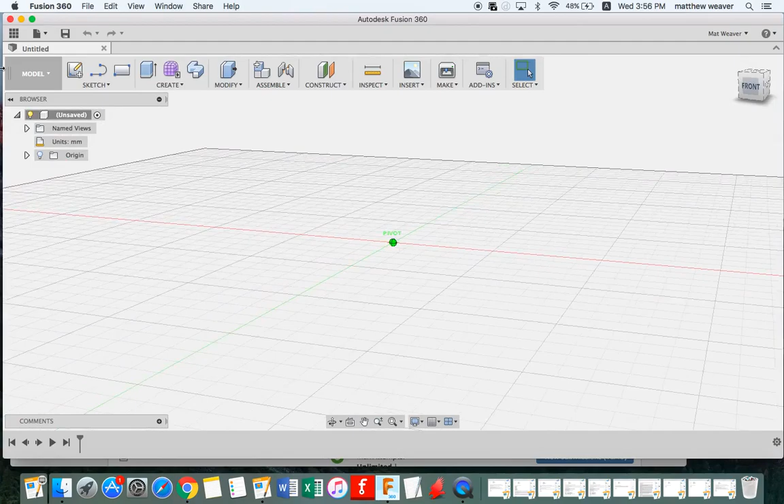When we open Fusion 360 for the first time, we're given this screen. We can move our canvas by clicking on the box and moving around, and you'll see that the flat plane moves. What we're actually doing is either moving ourselves around a pivotal point in the middle, or moving the world around that pivot. It doesn't really matter what your perspective is, just understand that when we move the cube, we move the world.

Okay, let's say we've got a crazy orientation there. To get back, hover over and press the home icon. Sometimes it doesn't work, and if that's the case, you need to restart the application, and this will start working again. We can easily have a look at the top, go around, have a look at the front, and have a look at the right side.

What you're going to be doing is making your Pinewood Derby car, and in order to start that, you need to decide where you're going to look at it from. Are you going to look at it from the top, draw a square and pull up? Or are you going to look at it from the front, draw a square and push back?

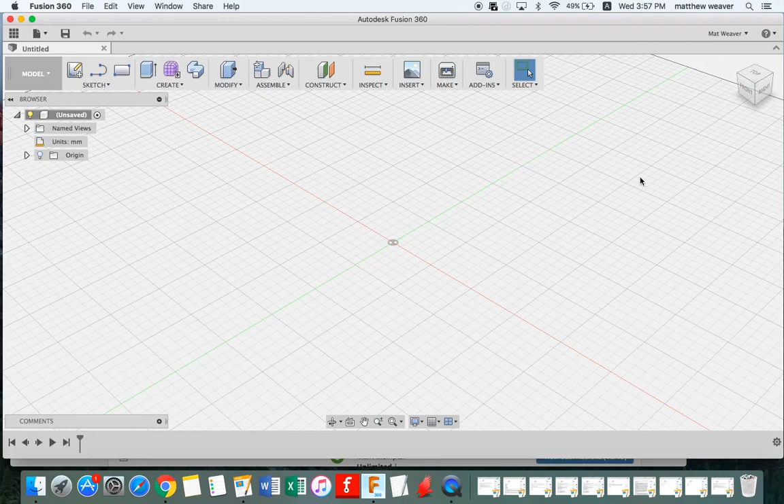I'm going to start at the top. So what I do is go Sketch, Create Sketch, select the bottom, the flat plane, so now my view is from the top down.

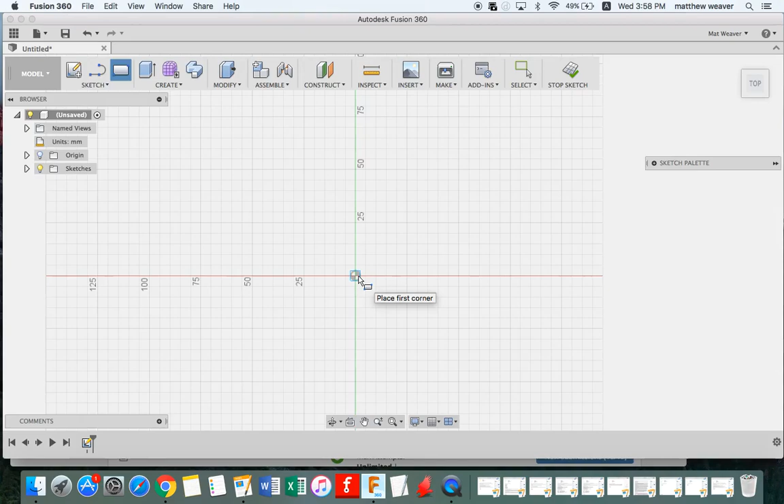You're going to draw your rectangle, and try to keep it as accurate as possible. So if my car was, say, 15 centimeters, that would be 150 millimeters. So there's 10, and there's another 5. Keep going, keep going, and you'll see the number at the bottom changing to 150.

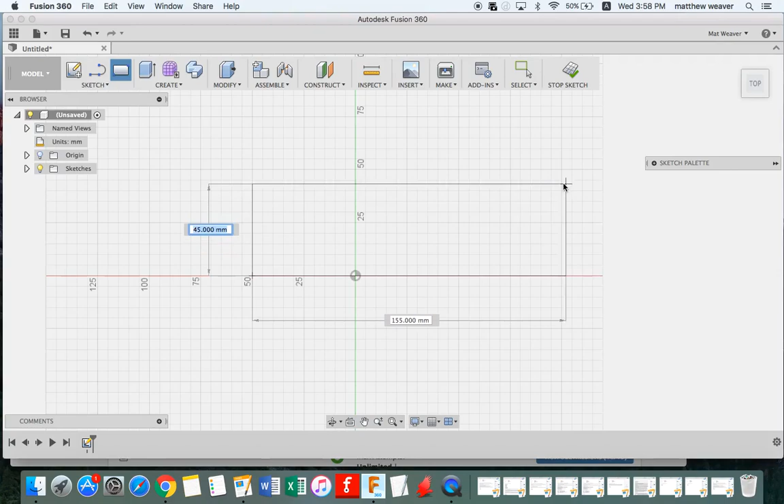The number at the side is changing, and that's the width. So my width was 40, let's say, and my length was 150. I could move it around, or I could tap in 40, tab, 150, enter, and that would be my car.

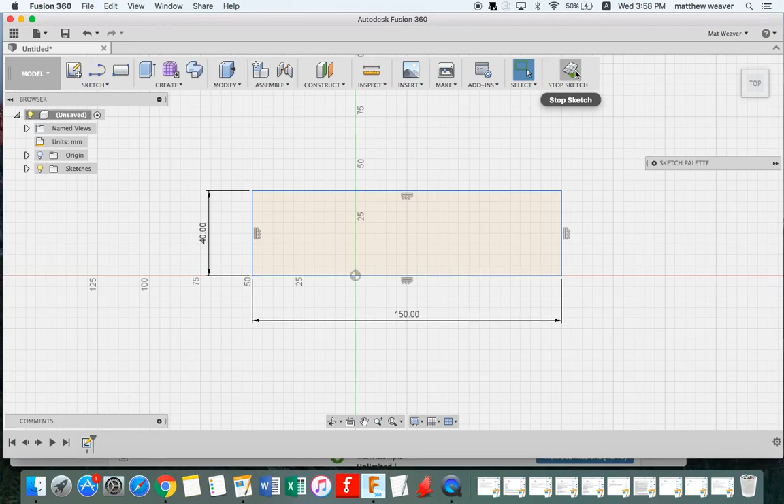Of course, your dimensions might be different, so I suggest you look in your books to get those dimensions. When I'm done, I'm going to stop the sketch, and this brings me back into a 3D view. The next part is I'm going to modify this.

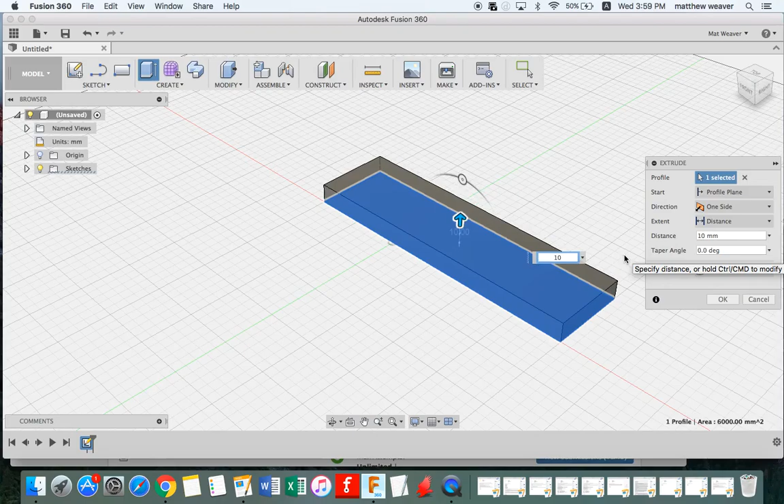I'm going to drag it up to make it into a 3D form. So I click Modify, press Pull, click it, and move it up. Now my block of wood happened to be 15 millimeters. Yours might only be 10. If it was 10, type in 10, or 12 - I'm going to type in 15. Okay, now I've got the block of wood.

There's a few things I can do. I can either turn it into a block of wood, make it look cool, or I can start shaping it. I'm going to start shaping it first. So what I do is draw a line around here, and push it away.

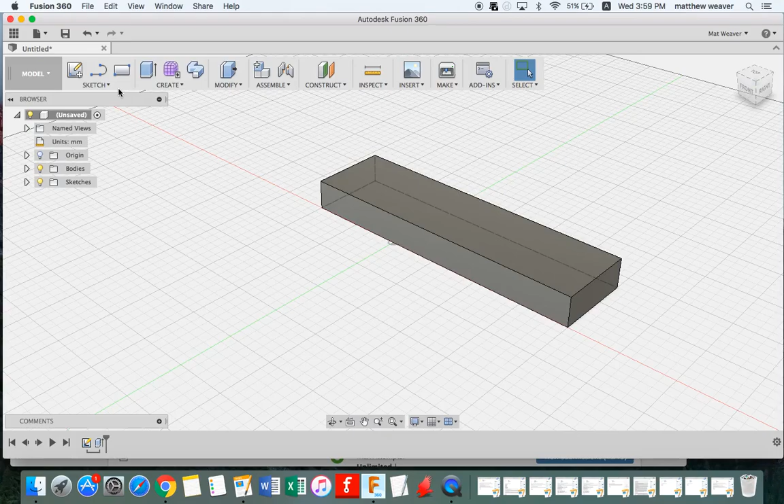Watch: Create the sketch, click on the side of the wood itself. Now, have a look at some of these - straight lines, rectangles, circles, arcs, ellipses. I'm going to use a spline.

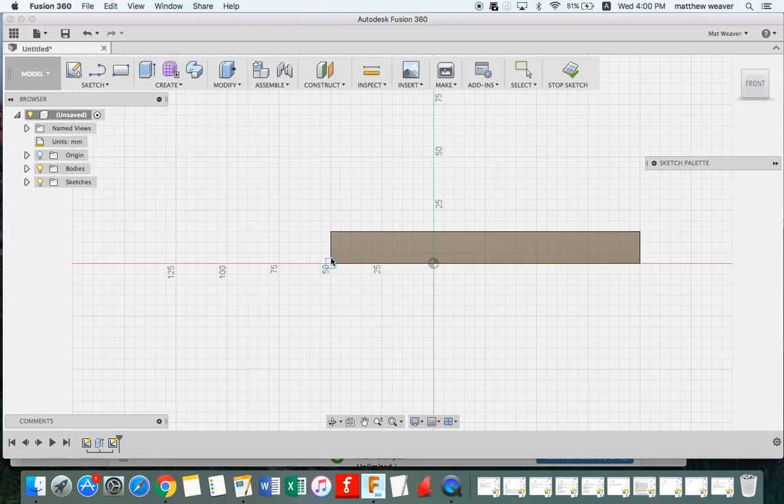A spline is one of those wavy lines. So I'm going to go here, then click here, and that gives me the bend. Then there, and then come all the way up to here. When I'm finished, I'll click the tick. Okay, there's the spline. As you can see, it's on the side of the profile.

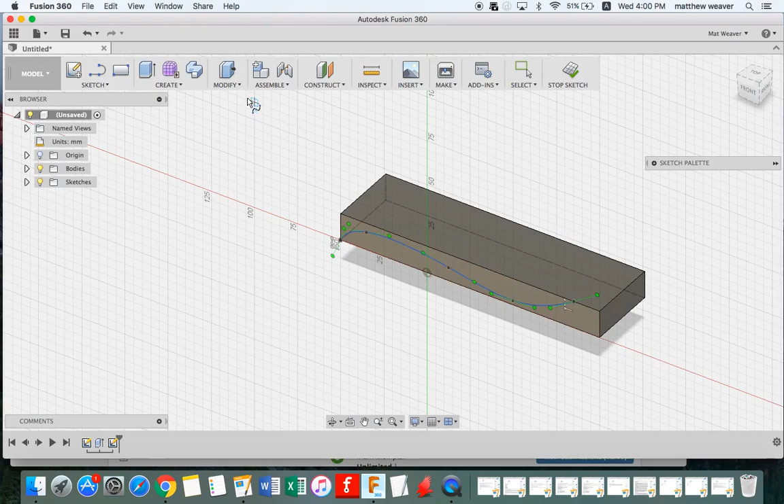What I'm going to do is push this away. So I go Modify, press Pull, select that, push it away. Can you see it's red? The red means it's subtracting from the actual target.

As you can see here, the operation is also cut. I could join, but that would serve no purpose. So what I do is I'm going to go Cut, and click OK.

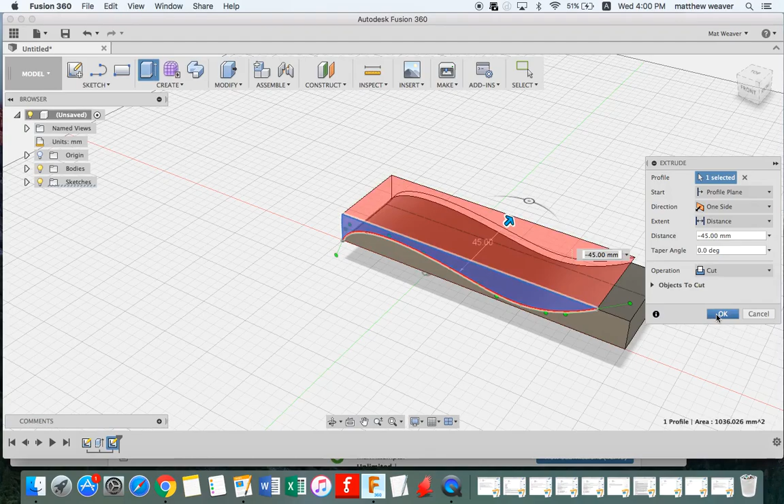Now if I press Shift with 2 fingers on the mouse pad and move them, I can move it around really easily. Or I can use the cube again, or I can just go straight home.

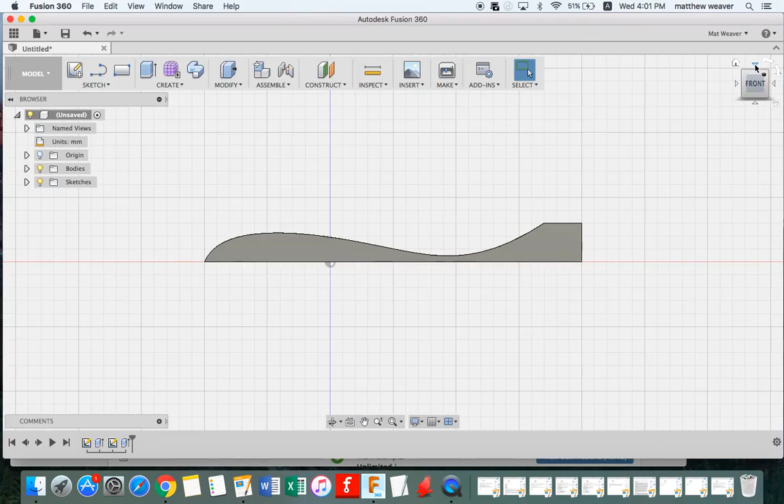Now, at the moment, this is looking very cool on the side, but if I looked at the top, it's only a rectangle. So what I would like to do is draw a shape here. For this demonstration, I'll even do it. The first thing I need to do is make everything symmetrical. I'm going to talk very slowly, or you can always pause it and replay it.

I'm going to go construct, mid-plane. No, I'm not, that would be very silly. Don't do that, okay.

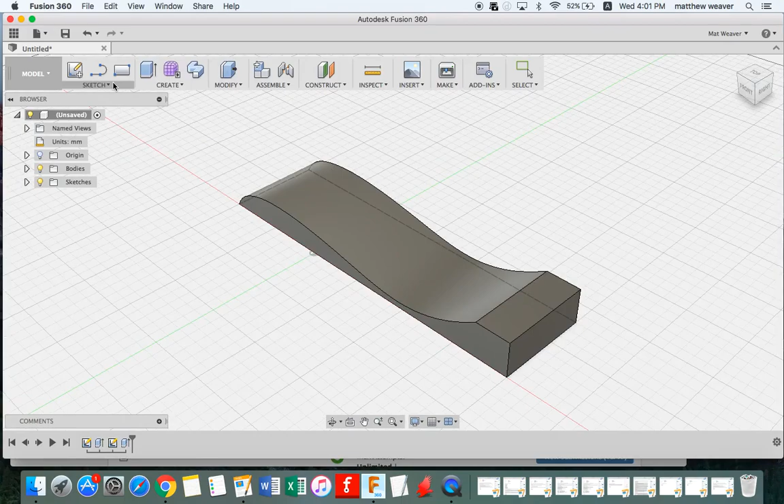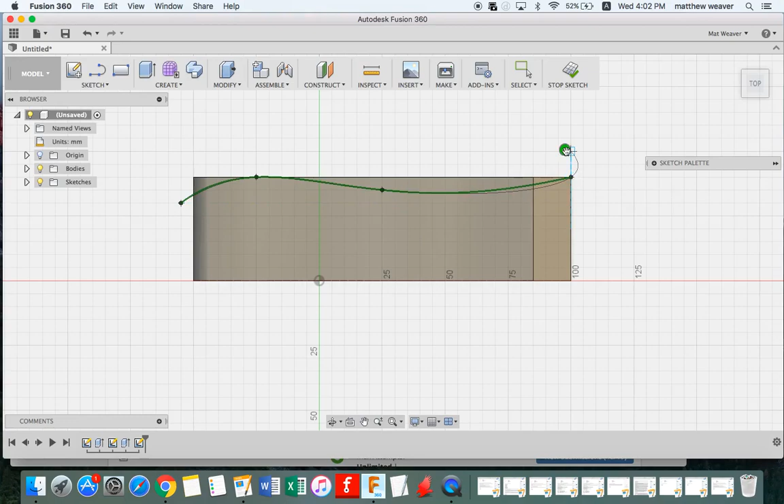I'm going to draw a spline on the top of my shape. Start here, here, there, there, finished. And now I'm going to mirror that to the other side.

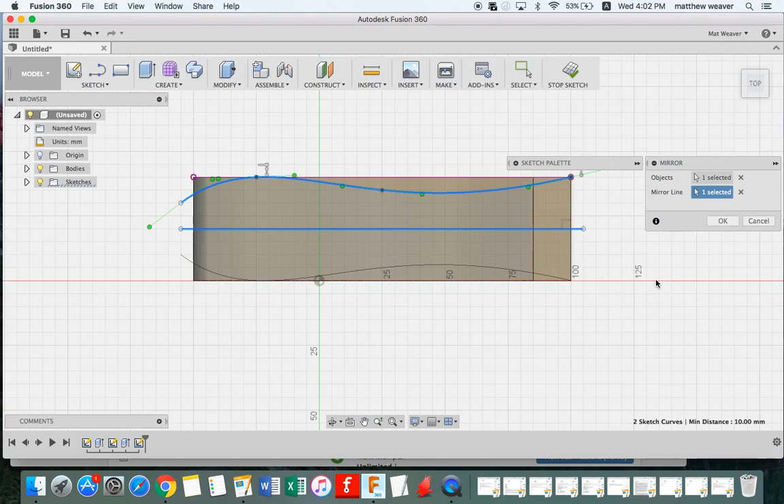First of all, I need to draw a mirror line. I'm going to get a line, there's the mirror, I'm going to draw a line all the way across. Okay, press the tick. Now I go sketch, mirror, object to mirror is that, the mirror line is that, and as you can see that is now mirrored over there, and then OK it.

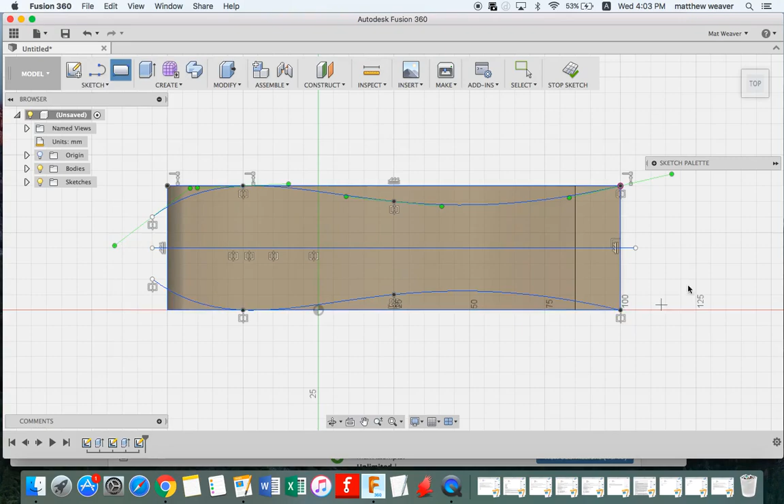Let's go back into the 3D view. Now as you can see, this one is solid, but this one isn't. So let's go back into the top view, turn that around, and I'm going to draw a rectangle around the whole thing. Okay, let's have a look now. So now you can see I've got the whole shape floating above the car.

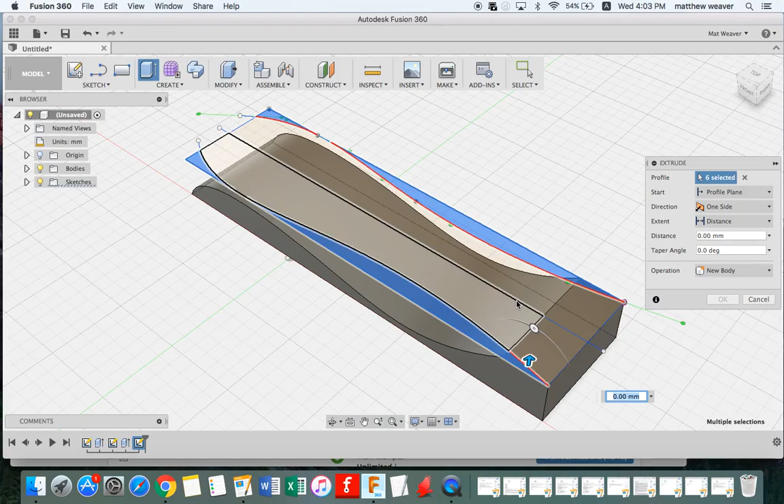So let's go modify. I'm going to select this one and this one. I'm selecting everything that I want to be used to cut away from the car. Okay, so that's the shape, and now I'm going to drag it down. As you can see, I'm cutting. I go okay, now I have almost a little bit like a fish, but it is a car shape.

It's a little bit straight. What I could do is round the edges, like if I was going to sand it. In order to do that, go to modify.

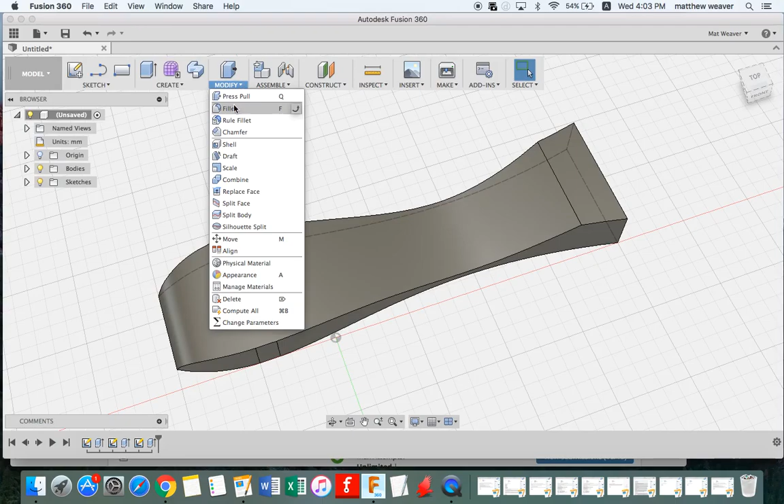You can go to fillet, and then click the lines here, here, and now if I type in 2, it moves it around. Can you see that? So if I move it to 6, then it gets really lumpy, and if I go crazy to 100, it won't do anything. You see, I get the error here. So don't press enter if you've done it wrong.

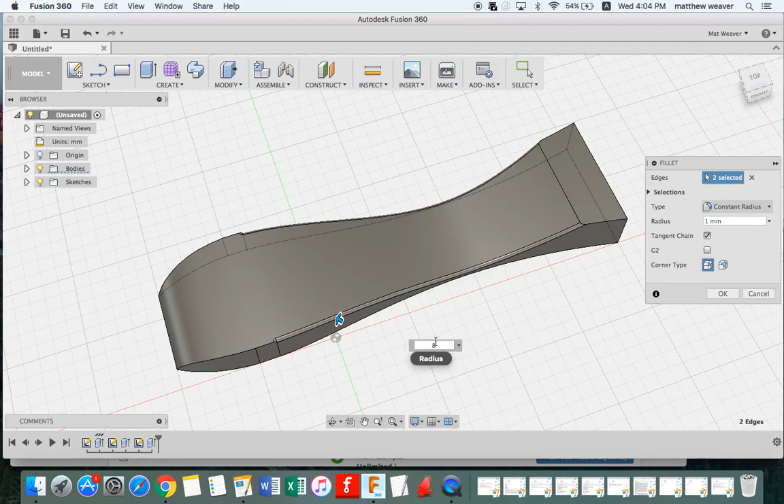I'm going to go to 8. I think that will be enough to make it look pretty cool and not too crazy. Okay then, so now I have the shape of my car.

Okay, I'm going to draw the wheels and everything else, but first of all I'm going to show you how to turn this into a piece of wood. Now notice how quick I did this. If I made a mistake, it's actually quicker to do it again and not have to undo stuff.

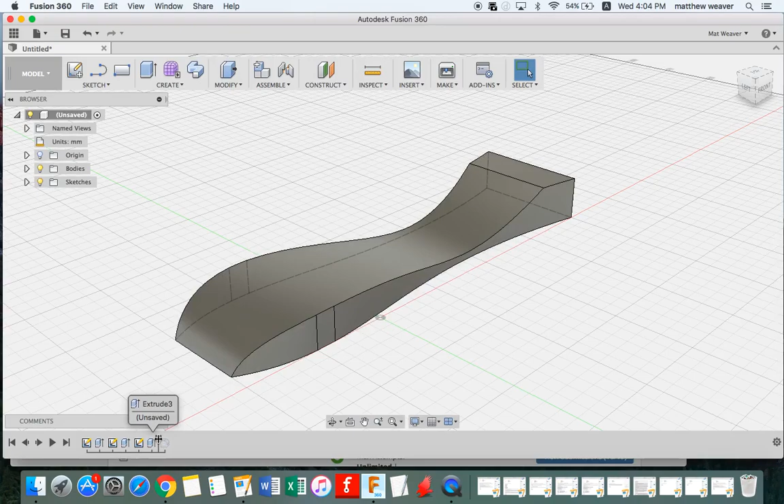If you do need to undo stuff, it's down here. Okay, slide it down, slide it down, slide it down, and that's like your history. So let's go all the way back up. Okay.